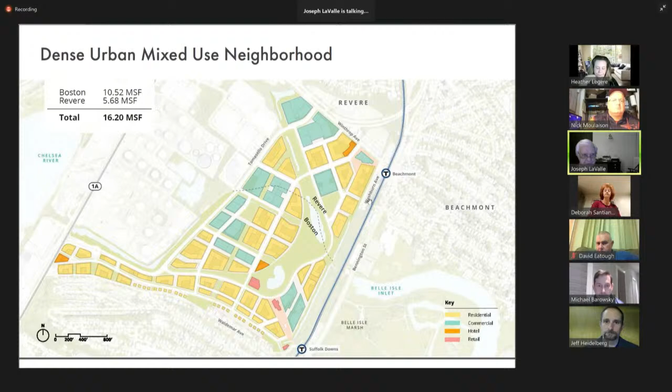So as you recall, we're starting our development here in phase 1. Our parcel R9 is part of our initial phase. I think we've come to you with all the other buildings thus far.

So now we're just here to talk tonight about parcel R9. This gives you a little bit more of a snapshot. You can see building R9 is situated just up against the entry plaza to the site. The plaza will be for pedestrians as they enter the site, and this building is very important because it fronts the plaza.

So we've taken a lot of care in terms of the architecture, thinking through how it meets the plaza. The plan for this building is that it will be residential with ground floor retail. The building is in total about 340,000 square feet with 24,000 square feet of ground floor retail, which would be a mix of restaurants and other eateries, could be a coffee shop, could be also some neighborhood retail.

We haven't developed the retail program yet, that's to be determined. Again, this building won't be delivered for another 2 years, at least 2.5 years, I think. And there will be 475 residential units above, comprised of studios, 1-bedroom and 2-bedroom units.

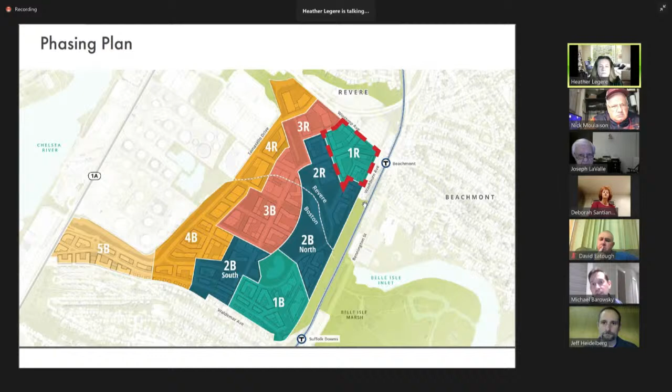Could you point to that for me? Yeah, Jeff is pointing out right now. So I'm trying to get a feeling for the access and egress, is that going to be from Washburn then? No, I should have pointed that out, maybe there's a better plan. So Washburn Avenue, here it looks like it's coming in from the top there.

So the main street, the main road into this initial development phase is Road B, as Jeff is pointing out. That will be a fully signalized intersection. We're doing a whole series of off-site roadway improvements as part of that, which must be completed in advance of the first building delivering here. We're working with Howard Stein Hudson, our transportation engineer, and we're still in the very early design stages, but that will be the main point of access, Road B. In addition, you can see there's a parking lot up to the left, and then there's a temporary road which we're building.

There's a temporary road which will lead back to Tomasello. So that way, people who live in the building will have 2 ways to get to building R9, either via this temporary road by Tomasello, or Road B, which again will be a fully signalized intersection, kind of our main street within the Suffolk Downs site.

So that area looks like pavement between Winthrop and Washburn. That's just a walk area to have access to the T station, et cetera. Correct. This is all pedestrian, yeah, this is a pedestrian plaza. It'll be very, very well designed.

There'll be street trees, and then there'll be some softscapes, some greens. There'll be a kind of a grass area here in the middle with some decking material that would be ideal for performances or just gathering spaces to maybe host local events. Good, thank you. Okay.

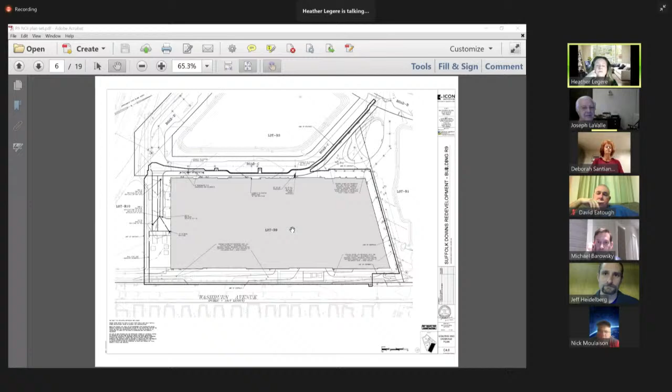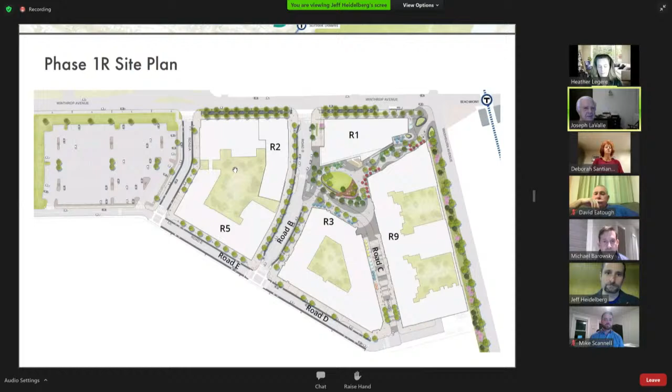So when they first made the presentation, that first aerial photo that Jeff or Mike showed gives you a great perspective of where everything goes eventually in this area. It goes right into Belle Isle, and it's a beautiful shot. Do you have that, Mike? Jeff is pulling it up now — the original photo. Look at that one, you get a good perspective on both of them.

Okay, so what elevation are we at? What building? What elevation is this building? So here, I'll go back to the other one. Yeah.

So if I zoom in here, we have grading that goes around the site. We've got elevation 18, a little higher on the front side. On the back, we're looking at elevations around 17. There's a slope here to connect to the roadways, at elevations 16 to 17, heading up, and then we start ramping down into the underground parking.

Okay, and where are you discharging any water from the site?

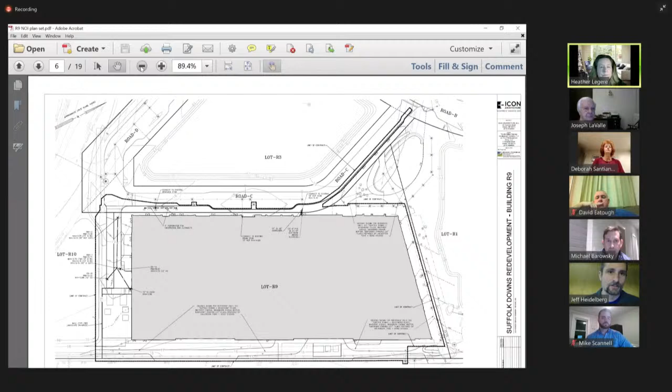So as part of the roadway and infrastructure notice of intent, we included the master plan drainage design, which included the flow coming from this parcel and all of the parcels tying into that master plan drainage system. Let me see if I can pull up those plans, which include the full property. Give me one second. Is it flowing out onto Winthrop? So a portion flows, there's a drain line here. I'm almost there, just give me one more second.

In total, how many apartments do you envision in Revere, and then in total, Revere and Boston?

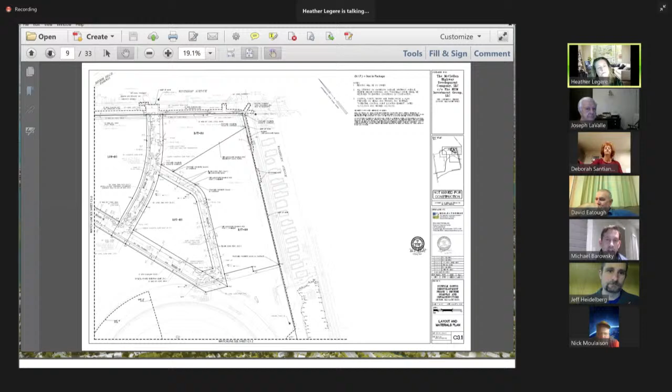So it'll be a mix of, I guess I could answer that while you're looking. There'll be roughly about 3,000 units in Revere, a mix of senior housing, apartments, and condominiums. Over the entire site, there'll be an additional 7,000 units in Boston, again a mix of senior housing, condominiums, and apartments.

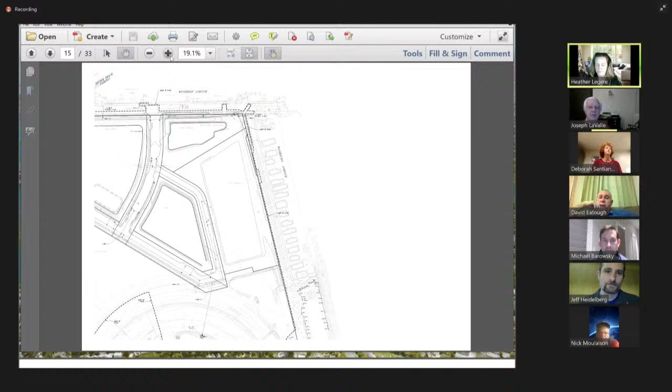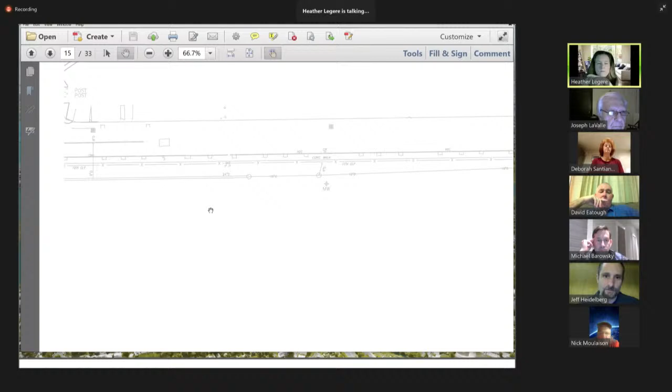So this is the master plan that was approved. This was the notice of intent included for the roadway and infrastructure portion, which included the master plan drainage. For this portion, there's a drain line that runs along Winthrop Avenue. Along this frontage here, you can see this drain manhole, there's a small D. I'm not sure if you can see it, if I zoom in more you might be able to. You see these manholes and this little D?

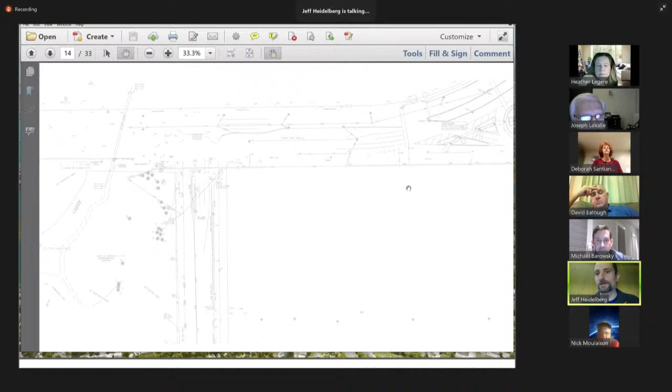Yep. So we do tie a portion of the drainage into that line along the plaza area, for example, which will tie into that drain line that discharges. Give me a second to scroll to the next page. On the right-hand side is where we're coming from on that drain line, it continues along that frontage. You can see this D here along Winthrop Ave, Revere Beach Parkway, and then it discharges at this location here, at the Green Creek portion of Sales Creek.

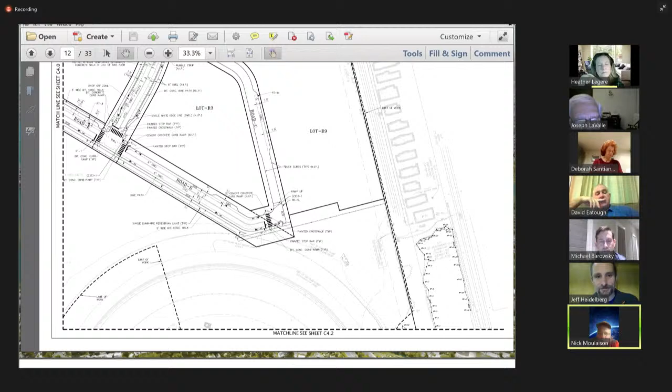That's where a portion of the drainage goes, and the other portion connects to a detention basin that used to be part of, it used to be a CAFO pond. It's no longer part of the Suffolk Downs. We have a separate drainage detention basin located on the south, just off this area. Now, I do remember going through the plan in larger form, but now you're just coming back building by building, is that what you're doing now? Exactly. So this was the master plan reviewed previously. You can see this drain line connecting to this detention basin. So this is what we're connecting into, which ties into that detention basin that then discharges to Sales Creek, just as it used to.

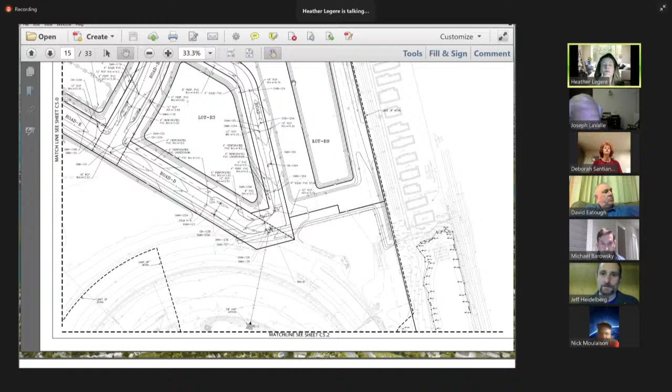Now, do you have oil separators placed in the parking garage? So within the parking garage, that would be governed by plumbing code for drainage interior to the building. But we do have water quality inlets where necessary, and we're providing our TSS, total suspended solids removal, through the detention basin and other means.

So nothing nasty, no oil or pollutants will exit into that creek. Correct, yes. Currently everything flows undetained directly into the creek, but we're now bringing everything up to stormwater management standards required today, an 80% plus TSS removal rate, detention, attenuation, and infiltration. We're now meeting the Mass DEP requirements, whereas previously all of that was flowing directly into the creek. So this is a significant upgrade from what's out there today.

It's true, but I would be remiss if I didn't ask and make sure the details are all set. Absolutely, yep.

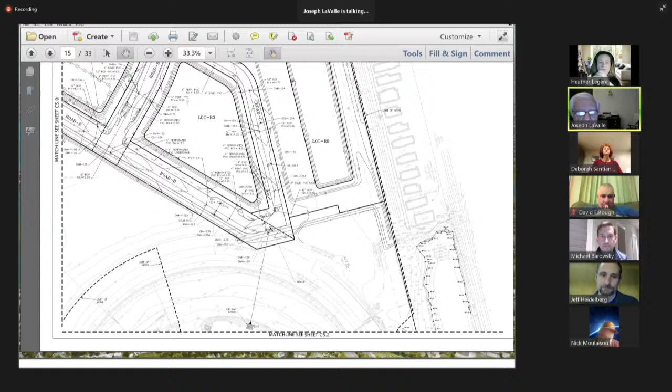All right, any other questions? Any other commissioners have any questions? Quick, big picture question. Right now there are three different roadways to this property in total, one on the Parkway and two on Lee Burbank. Is the intention to stay with those three, or do you intend to add a fourth, or block up that second one going to Lee Burbank Highway? Do you have any idea on that? Yeah, sure. So the one on Route 1A, Lee Burbank Highway, on the left side of the screen, that will remain. There will be road work happening as part of this project in the future, improvements along Route 1A, but that intersection will remain and become a newly, fully signalized intersection.

The Tomasello intersection with Winthrop Avenue will remain. We are going to adjust how Tomasello comes straight out to Winthrop Avenue, and in a future phase, we'll adjust the road so it curves right a bit. It's better for traffic flow and patterns. It's very close to North Shore Road now, so it creates an issue with queuing. That will remain, fully signalized.

And then we're creating the new one, the other fully signalized one, which is Main Street, which I talked about before. There's one additional inlet to the left, a right-in and right-out from Winthrop Avenue. It will not be signalized, but it's an additional outlet for people to get into the site, and also to get out of the site and head east or west on Winthrop Avenue. That doesn't exist now - I mean Main Street doesn't exist now.

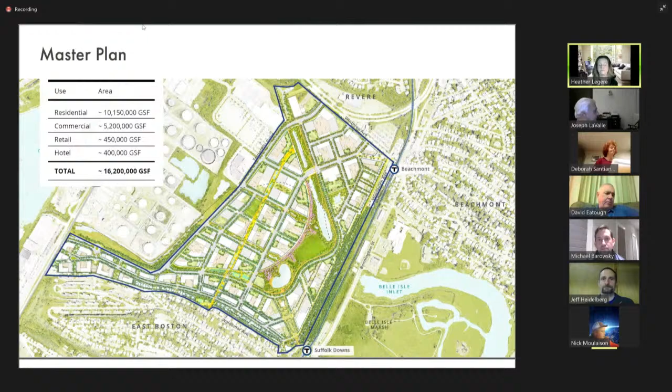All right, next on the agenda is a public meeting for 48 to 50 Arcadia Street, certificate of compliance, Maureen Testa. This is an old order of conditions from 1986 that somehow never got closed out, or it did and they lost the certificate, but she sold the property and has a closing date at the end of the month, so we need to get her a certificate of compliance. It's so old I don't even know what the work was - that's how old it was. So I told her we'll issue her a certificate of compliance. The house has changed hands a few times within her family, so it got filed somewhere, but someone lost it.

So do I have a motion to approve the certificate of compliance for this woman? I'll make a motion to that effect. Joe makes a motion. Do I have a second? I'll second. Seconded by Dave Eatough. All in favor? Aye. Aye. All right, so next is communications.

We got a letter from Mass DEP. They are appealing 320 Charger Street, and I'm sure you guys all got a copy of it. I spoke with Rick Salvo from Engineering Alliance. He's going to try to make the changes that DEP wants without DEP actually taking over the order of conditions. So he's going to work on that for hopefully next month and come back in front of us for an amendment to the order of conditions. It's basically for the storm water - they want to make sure that what they're proposing will be enough to catch any of the storm water. So we will hopefully see him next month for that.